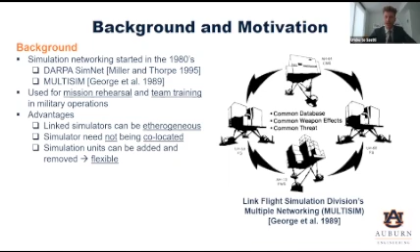The simulation units do not need to be collocated. In fact, distributed simulation units can be connected across large distances to the same simulation environment. Also, these simulations are flexible in the sense that simulation units can be added and removed without disruption to the main system.

This kind of architecture allows for multi-pilot or multi-aircraft operations, such as aerial refueling, cooperative sling load carriage, air combat, or air traffic management. There may be other examples as well. However, these systems have historically not been used in general for research.

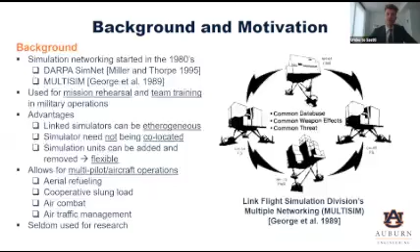So how can we take these ideas and make them more contemporary? One thing we can do is start observing that some of the past approaches used projected screens, large motion bases, and realistic physical cockpits, just because there was no other way to model a cockpit of an airplane, if not physically.

This contributed to making the system very large and heavy, and therefore gave them a high acquisition, maintenance, and operation cost. So typically, this kind of network system was a government initiative rather than a university initiative, just because of the cost associated with them.

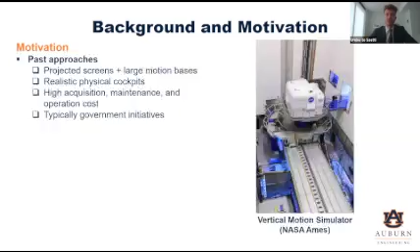However, the advent of virtual reality can significantly change things, in that it eliminates the need for large projected screens and physical cockpits, which reduces the size and weight carried by the motion platform itself. This allows for lower mass and inertia of the motion platform, and so increased motion bandwidth and range. It also allows for lower cost, so these kinds of network simulations become more affordable for academic research, not only for government or large corporations.

Also, one could think about virtual reality in that it allows for a 360 visual environment, rather than a visual environment that is limited to how big the projected screen is.

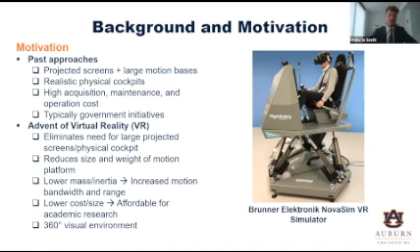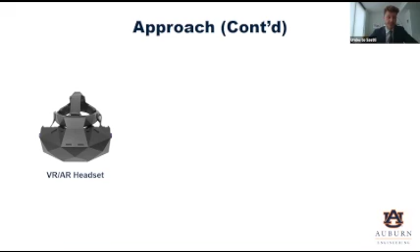Moving on to the laboratory vision, the approach I would like to take for the planned lab is to merge the latest technologies in virtual reality and augmented reality, motion tracking, and haptic feedback pilot suits, with a motion-based simulation unit, shown on the right, to allow for immersive augmented reality simulations suitable for research purposes, with the platform contained in size and also in cost.

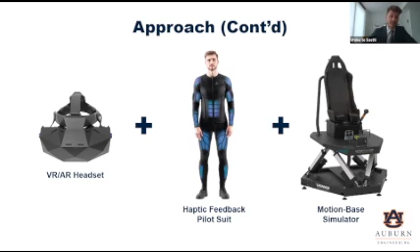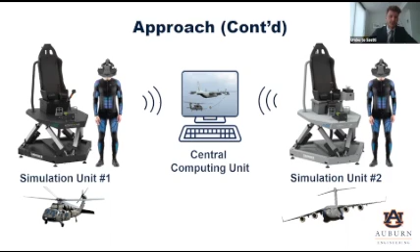In addition, I plan on linking multiple of these units—for starters, two of them—and then I may acquire more in the future, to allow for research that involves multiple pilots or aircraft, such as, again, aerial refueling, cooperative sling load carriage, air combat, or air traffic management, and there may be other applications as well.

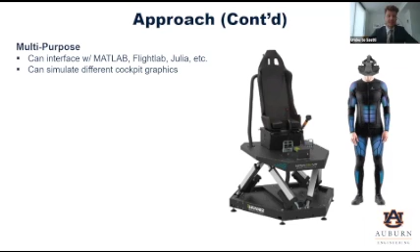So the resulting system that I plan on building would be multi-purpose in that it can interface with multiple simulation environments such as MATLAB, FlightLab, or Julia. It can simulate different cockpit graphics, because within the graphical interface we'll use at the beginning, which is X-Plane, one can simulate or construct different simulation cockpits.

The system will be reconfigurable because it will be equipped with both fixed wing and rotorcraft controls. So the system will be able to simulate either general aviation airplanes, jets, or rotorcraft, and it will also be able to implement motion cueing algorithms.

It will be modular in that multiple units will be able to be linked together, and it will have an enhanced motion cueing experience, just because the weight on the motion platform is basically just that of the pilot, so it has pretty low mass inertia, which gives an increased motion bandwidth and range. We'll see some of the characteristics of the simulator later on in the presentation.

Also, the simulation will be immersive because virtual reality provides a 360-degree vision environment, and it allows for a look-down capability, which is very important for helicopters, but that many simulations out there do not have, just because they're not using virtual reality. So that's one of the perks.

There are also, of course, upsides of using virtual reality. Another perk is the augmented reality approach, which is basically a feed-through approach for the pilot, in the sense that the pilot can see the simulation environment, but can also see outside of the simulation. So the pilot will be able to see its hands.

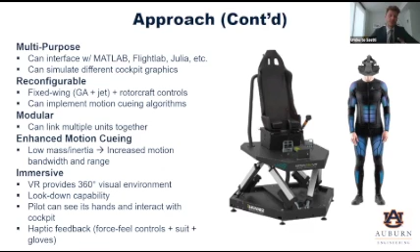Also, the simulation will be immersive in the sense that it will use haptic feedback. This feedback will be provided to the pilot through force-feel controls, through a full body haptic feedback suit, and through haptic feedback gloves.

So this system will enable the following broad research topics. The plan will be to conduct fundamental research on virtual reality and augmented reality for piloted flight simulation and handling qualities evaluations, development and testing of advanced flight control systems, and novel cueing systems and algorithms such as tactile cueing systems and haptic force-feel cueing through the suit and through the controls.

One example is that the position of an adversary fighter jet would be cued to the pilot's body through the pilot suit. So the pilot would feel the position of the other aircraft on its body. That's one of the ideas that has actually been researched in the past, that's why I'm able to speak about it.

Another avenue for research will be simulation of high acceleration flight with low acceleration motion feedback, because of course the motion system has some limitations in the accelerations it can provide. However, with the pilot suit, one can simulate accelerations on the body of the pilot with localized pressure. So that's another thing that could be studied.

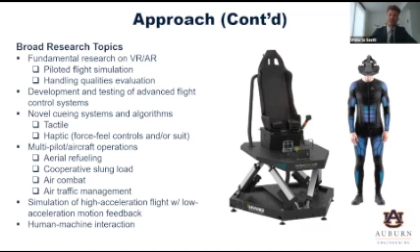We're going to study human-machine interaction and also development of pilot models.

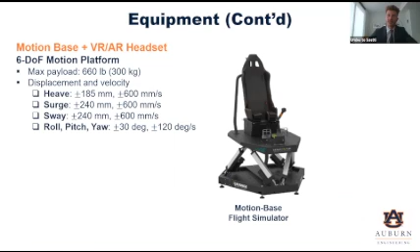Just to give a brief rundown of the main highlights of the equipment, about the motion base and the virtual reality headset: the motion platform payload is about 660 pounds, equivalent to 300 kilograms. The displacement, especially of the angular motion, is about 30 degrees, but it has a pretty high bandwidth, arriving at about 120 degrees per second, which is high compared to other motion platforms out there for the same cost.

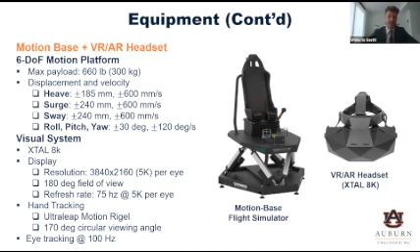The visual system is a VRgineers XTAL 8K, which is, for now at least, the most advanced headset available on the market. The resolution is about 5K per eye, with about 180 degrees of field of view and a pretty high refresh rate. It also has hand tracking, so it can track the hands of the pilot and recreate them in the simulation environment through UltraLeap technology, and it also has eye tracking in case one wants to study human factors.

About the haptic feedback pilot suit, this is a Teslasuit, and it's got a haptic feedback system with about 80 electrostimulation channels and 114 electrodes. It has the capability of biometry and also motion tracking through both 6-axis and 9-axis IMU, with the 3 additional axes from the magnetometer, and it transmits its data through Wi-Fi.

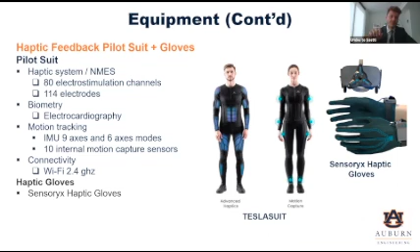And then the last piece of equipment that I plan on acquiring and using are feedback gloves, so that a pilot can be cued information through these haptic feedback gloves.

Of course, the simulation units would be nothing without a brain to power them. So during my postdoc, I took some time to develop several simulation models, one of which is called Rotorcraft Simulation Engine, or ROSE, as it started as a simulation environment for rotorcraft. However, it also became a simulation environment for aircraft, so I will have to change the name soon.

In any case, this simulation environment is developed both in Julia, a programming language by MIT that is open source and compiled, and MATLAB, which is similar but not exactly the same, because Julia is compiled while MATLAB is interpreted. So a different approach, but similar results.

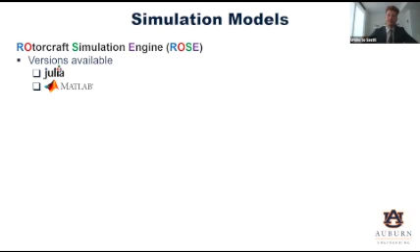The simulation platform is also available in MATLAB. I have various fidelity models for helicopters, including a simple helicopter model based on theory in the Padfield book. I currently have the UH-60, Bell 430, and other helicopters available in that.

There's also an ARMCOP model, based on a NASA technical report, which is a bit higher fidelity but not significantly so. And GenHel, a simulation model typically used by Sikorsky but available through a NASA technical memorandum, which is higher fidelity, mid fidelity I'd say.

But I recently augmented it with a state space implementation of a free wake, so CFD for the rotor, which has thousands of states. So this is very high accuracy.

I also have other models available, such as for an F-16, a fixed wing aircraft. And I recently developed an aeroacoustic solver for solving the noise produced aerodynamically by a helicopter. This is based on a marching cubes algorithm, typically used in computer graphics because it's pretty fast.

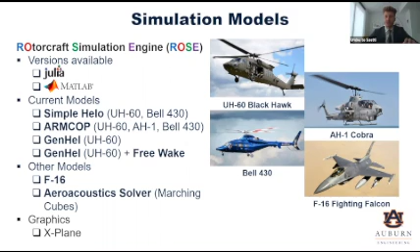The graphics used by the simulator are explained as well. Simulations could be configured as rotorcraft or fixed wing, depending on the mission task we need to accomplish.

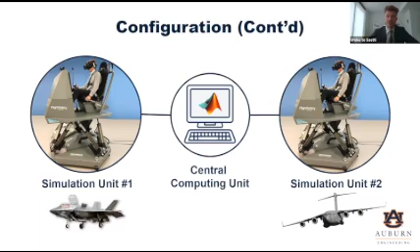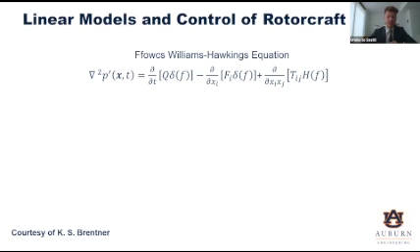I'll go briefly through the intended research I plan on using the simulators for. One is the linearization of the coupled flight dynamics and acoustics of a rotorcraft. For this, we can use the Ffowcs Williams-Hawkings equation, which describes aerodynamically induced noise.

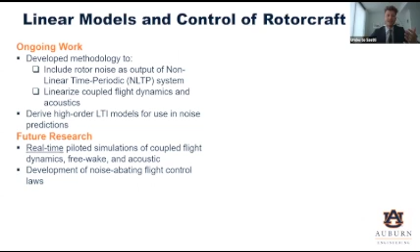Through coupling some of the simulation models I described before, one can include noise as an output of a dynamic system of a rotorcraft, then linearize through linearization methods we're developing, and use these linear models to control the noise of the helicopter and try to reduce it.

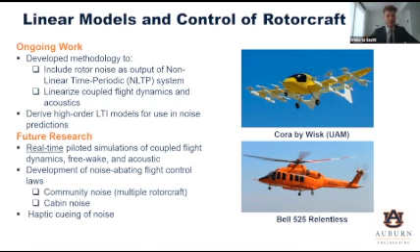This can be applied for noise in communities or noise in the aircraft, such as cabin noise. Cueing methods can also be developed through the simulation units to cue the noise to the pilot, making them aware of the noise the aircraft is producing at a particular point on the ground, in the cockpit, or elsewhere.

Other research I've started and plan to continue is the application of neural ordinary differential equations to aerospace vehicles. Recently, neural networks have been formulated as ordinary differential equations, and I plan on using these mathematical constructs as an alternative to system identification, using the simulation units to provide the data for system identification.

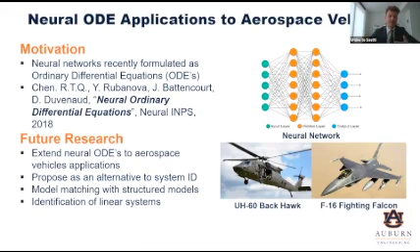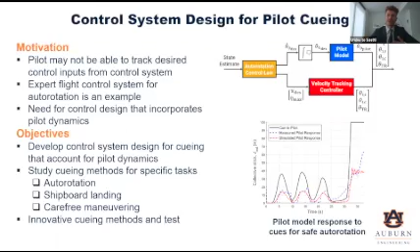There are other topics too: identification of time periodic systems of novel helicopters, control system design for pilot cueing for autorotations, and dynamics and control of eVTOL vehicles, similar to what Dr. Chakraborty does. There could be many opportunities for collaboration here.

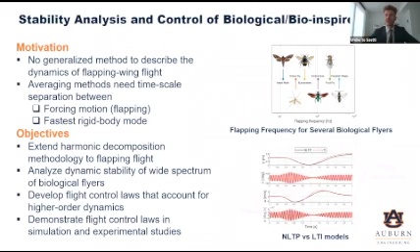One thing the simulation units will also be used for is the study of stability and control of biological and bio-inspired vehicles, such as insects or flapping wing micro aerial vehicles. All right, so that's all. Thank you for listening, and I'd be happy to take any questions you may have.

I have a couple of questions. One, really cool, I didn't understand - the haptic outfit, what is it? What are you using it for?

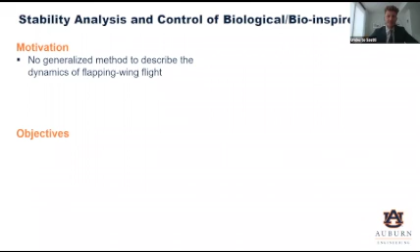One of the ideas I have is that one could cue, for example, the position of another aircraft, which may be adversary or enemy or not, to the pilot on their body through localized pressures, in order for the pilot to know where this aircraft is, for escaping from it or chasing it down.

Another way of using haptic feedback could be to let the pilot know if any envelope limit of the aircraft is being reached. For example, if the helicopter is in a position where rotor loads are getting too high, one could use haptic feedback, either through the suit or through the controls, to let the pilot know they're exceeding flight envelope limits. So this could be some of the ideas.

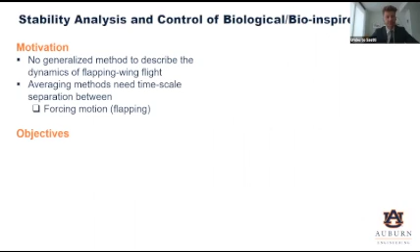I think. The other thing is, I thought Julia is a language, and you were mixing it with MATLAB, which I thought was a platform. So are you programming in Julia, or am I misunderstanding what you were implying?

Yes, I am indeed programming in Julia. The simulators I developed are available both in MATLAB and in Julia, but separately. I plan on going open source with the Julia version, probably within the next year or so. Julia is MIT developed, but it's just a language that can be used by anybody. Indeed, yes. Thank you.

Dr. Saetti, quick question. How long would it take you to add another aircraft to your simulation, such as the Air Force TX?

So I currently have the capability of adding rotorcraft quite easily through the simpler model, since it doesn't require many parameters to be set up. However, for fixed wing aircraft, my model is for the F-16, based on the Stevens and Lewis book, which has all the parameters and lookup tables for the F-16. To develop something similar for another aircraft, I would need all the necessary lookup tables. If those are available, then we can develop a simulation model quite feasibly in a relatively short time.